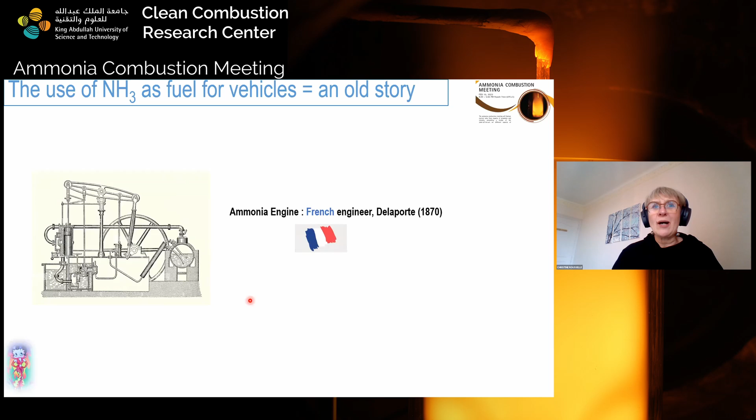So first, I want to start with a small joke. The first people who considered an ammonia engine was a French engineer in the 19th century. But as you can see, it was not really ammonia as fuel, but it was a steam engine. Anyway,

Dr. Room already showed this morning that from the past, there are different examples of the use of ammonia as fuel for vehicles, but we can see that recently there are new projects like the hydrofuel project in Ontario University. The objective is to develop trucks fueled with ammonia with hydrogen.

Also, there is the C-Free Run project in Iowa University. And what is interesting is that start and stop of the engine is done by using hydrogen. And when the engine is sufficiently warmed up, they can run with 90% of ammonia and about 10% of hydrogen. And more recently, there is a new project, Activate, from the Norwegian government. The objective is to develop a small tractor for agriculture vehicles.

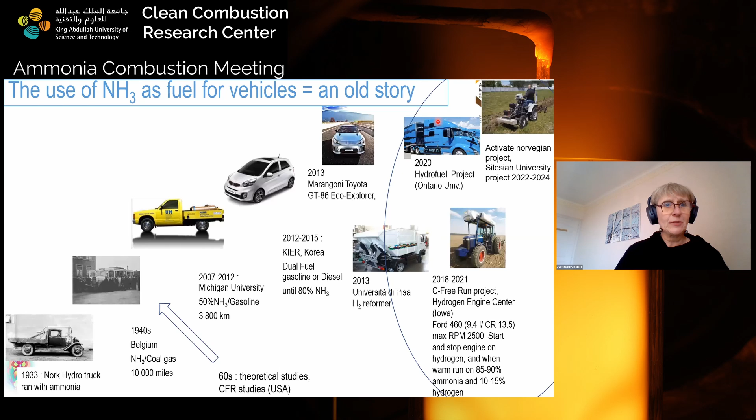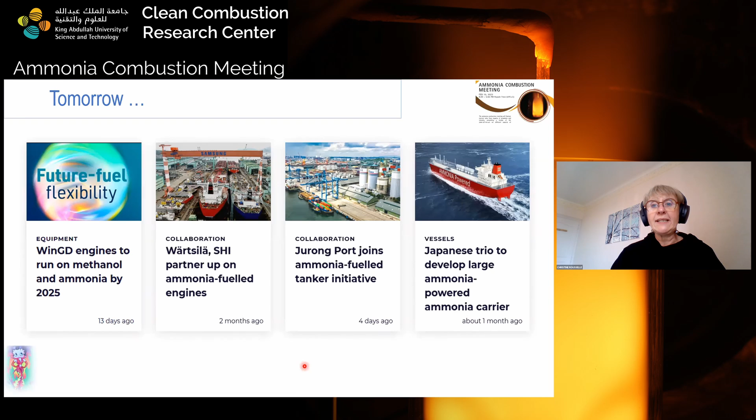Sorry. Okay, but as most of you know, if we go to the website, we have a lot of advertisement about what could be some kind of mobility with ammonia, especially for marine application. Even if they have this kind of advertisement, I'm not sure that until now there is any ship that can run easily with ammonia.

Okay, why is ammonia so relevant to use as fuel for internal combustion engines? Sure, it's great because there is no carbon content, so there is a zero carbon footprint that we can achieve, but also no CO or particulate matter emissions. We don't exactly know because we can have some issue about lubricants. There is a good energy density in comparison to hydrogen itself, and it is more similar to gasoline or diesel fuel. But what about ammonia combustion characteristics?

I don't want to take so much time to explain again, as we already saw a lot of presentations on this purpose during this day. But if we compare only auto-ignition delay with hydrogen, methane, isooctane or even methanol, we can see that the auto-ignition delay is very important in comparison to these fuels. Also, the adiabatic flame temperature will be strongly lower, less than 200 Kelvin lower, and the laminar flame speed is so small that we can have some questions about the good way to use ammonia in engines.

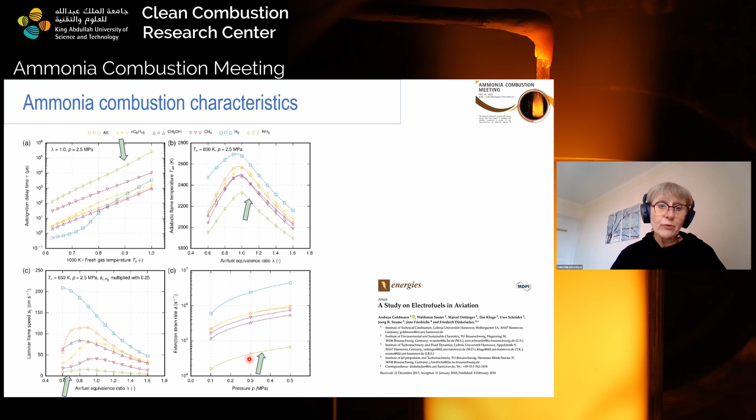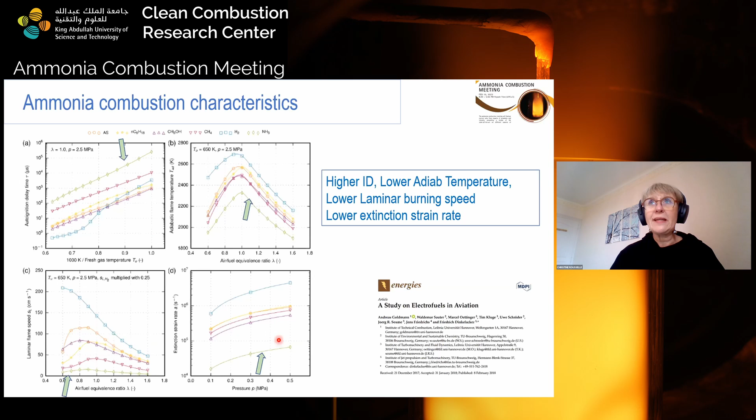And what is also interesting is that the extinction strain rate is very small. So higher ignition delay, lower adiabatic temperature, lower laminar burning speed, lower extinction strain rate. Can we think that it is possible to run in an engine? Certainly, it could be possible if we use higher compression ratios than we can use currently. Do we need a combustion promoter to boost performance and ensure stability?

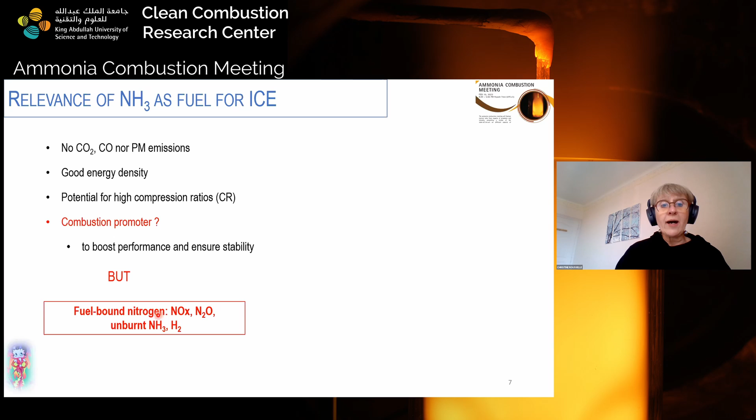But what we know is that, as ammonia is a fuel-bound nitrogen, we will have NOx emission and also N2O. And most of the time, we forget that we can have unburnt ammonia and hydrogen. Even if we use only ammonia as fuel, at the exhaust we can have some hydrogen, due to the decomposition of ammonia in situ in the combustion chamber itself. So it's clear that we need some mitigation strategy to limit pollutants and also to develop accurate post-treatment, as we will see after my talk.

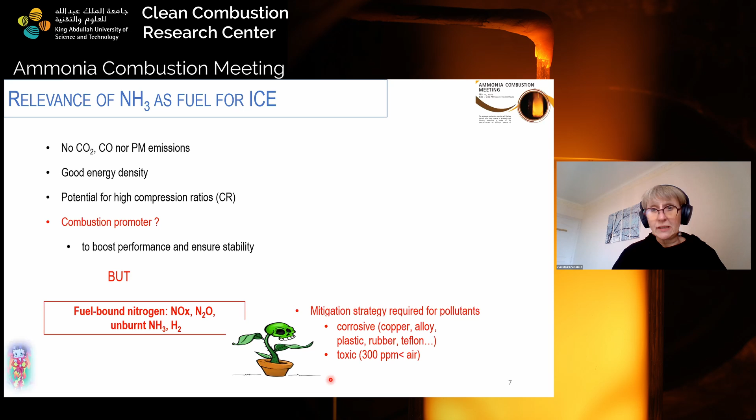And as you know, unfortunately, ammonia is corrosive and toxic. So internal combustion engines fueled with ammonia remain very challenging. What do we know exactly? From the past, from the different studies that we have, as with any fuel, we can consider spark ignition engines or compression ignition engines. To boost the combustion, we need an ignition or combustion promoter.

Also, in a compression ignition engine, we need at least a compression ratio of 35 in order to auto-ignite ammonia. So we need the help of a reactive fuel to promote the ignition. From the past, there are different bi-fuel experiments, blends with gasoline, natural gas, methane, alcohol, hydrogen, or for compression ignition engines with diesel, biodiesel, DME, and hydrogen. When we decrease the content and go until hydrogen and pure ammonia, it's sure that we will also decrease the carbon footprint.

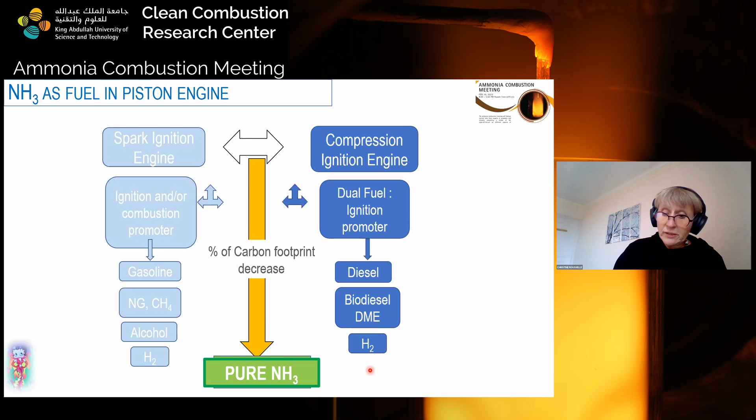Therefore, trying to use ammonia alone in an internal combustion engine would be the best choice to reach the zero carbon footprint objective. Some recent examples from the literature about spark ignition engines, from the last 10 years. First, from Pisa University, they used a very small engine with a port fuel injector, with ammonia plus hydrogen. They also studied the opportunity to use this kind of engine as a range extender.

More recently, we have another interesting study about the possibility to mix gasoline and ethanol with ammonia, but we can see that the content of ammonia remains very small. What is interesting is the idea to develop an emulsion between ethanol, gasoline, and ammonia. After, in Orléans, we studied pure ammonia or ammonia with hydrogen. It was in a current single-cylinder engine, fully premixed, with a regular compression ratio for a spark ignition engine.

More recently, we have a new study on natural gas and ammonia blends, the unique study in heavy duty. It was injected premixed by port fuel injection with a relatively low compression ratio engine. And recently, there is a new result from Toyota Group, and they especially focus on the cold start, in order to reform a little bit of ammonia and ensure the start of the engine. The compression ratio was relatively low.

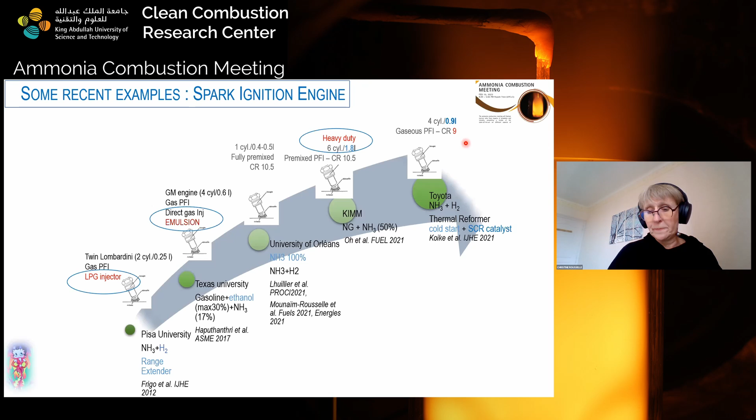About compression ignition engines, the studies showed different applications. Mostly, we can see dual fuel. It could be with DME or with diesel. But it is important to note that there is no more than 40% of ammonia in the fuel. And we have only one study considering HCCI combustion with ammonia. Also interesting to note is this last study with a bigger engine with a high compression ratio.

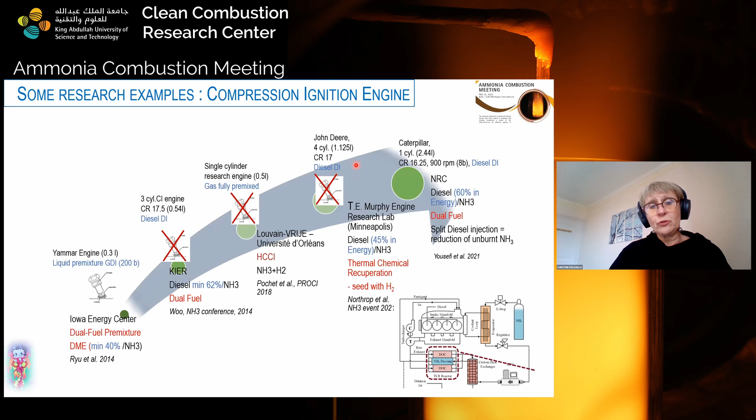If we summarize what we know from these previous studies, in the case of compression ignition engines, in comparison to a full diesel engine, the addition of ammonia increases the torque significantly, decreases hydrocarbons and CO2 emissions, but can also decrease NOx when the ammonia content is lower than 70%. When blended with DME, the maximum engine load is relatively limited. We cannot reach values similar to pure DME. And hydrocarbons, CO and NOx increase, but there is a strong decrease of soot.

If we look at the spark ignition engine, we can compare with a full hydrogen engine, natural gas, or gasoline. What is interesting is that with hydrogen, we increase the cycle thermal efficiency and the engine power, ensure no carbon emissions, and the same NOx emissions as a gasoline engine. With natural gas, you have a peak pressure decrease, but unfortunately, NOx and NH3 increase.

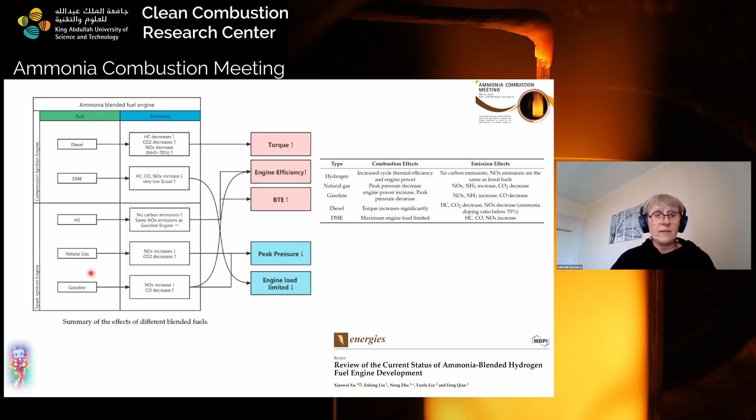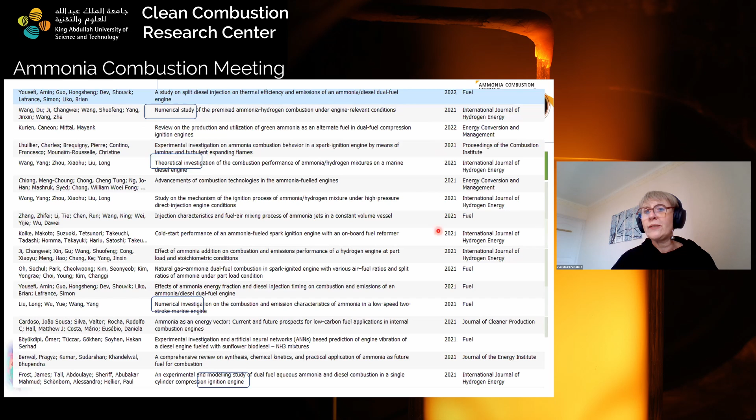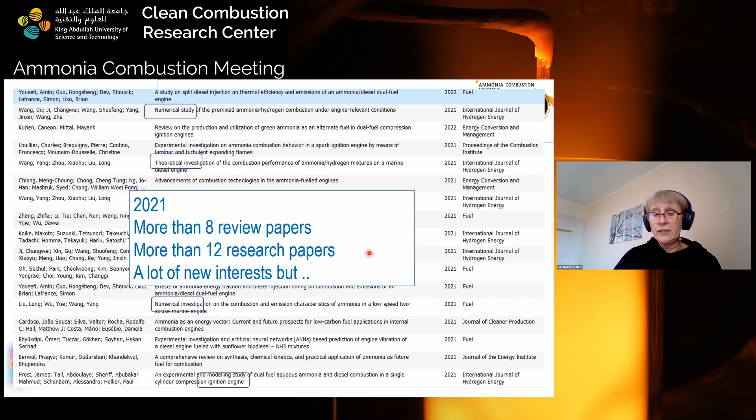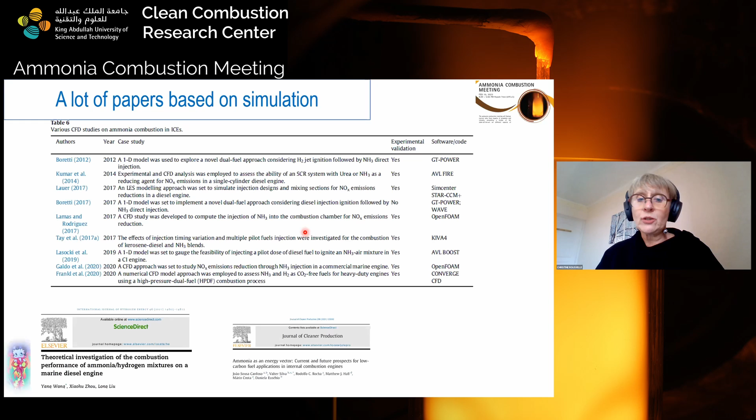Last week I researched the more recent studies from 2021 and 2022. There are more than 8 review papers and more than 12 research papers considering ammonia as fuel in engines. It's clear there is a lot of new interest, but there are also a lot of papers based on simulation to get an idea of the advantages of using ammonia as a fuel in engines. Can we simulate an ammonia engine with high accuracy and predict ammonia combustion in the engine?

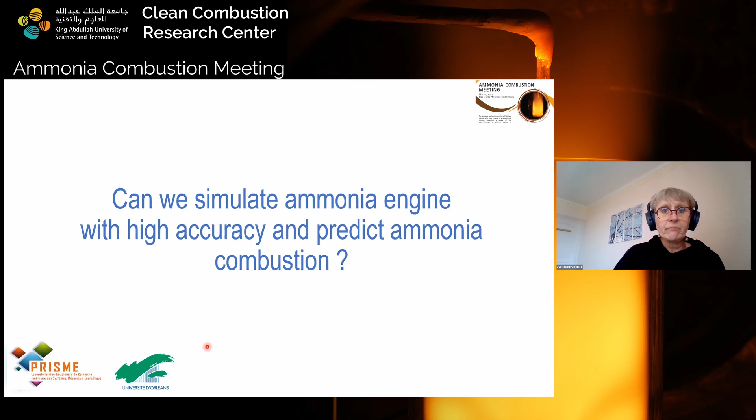We have different possibilities to use ammonia only in an internal combustion engine. As I already told you, it's difficult to auto-ignite ammonia, so we need an igniter, a spark, or ignition by pilot fuels. Ammonia can be provided to the engine in gaseous or liquid phase, by port fuel injection, direct injection, or perhaps both. If we want to add hydrogen as an ignition promoter, we can consider another tank with hydrogen or an onboard reformer.

This would be a spark ignition engine. What we have to deal with is optimizing the load as a function of engine speed, resolving the cold start problem, and reaching an ammonia-NOx emission trade-off. If we use a pilot injection of a reactive fuel, we can also use a diesel-design engine and optimize the different injection systems.

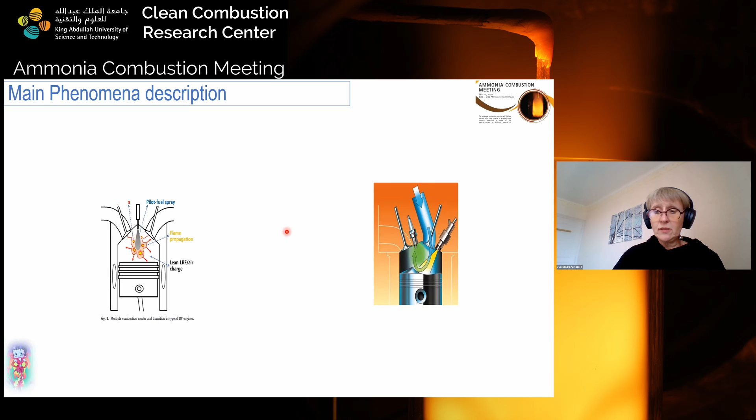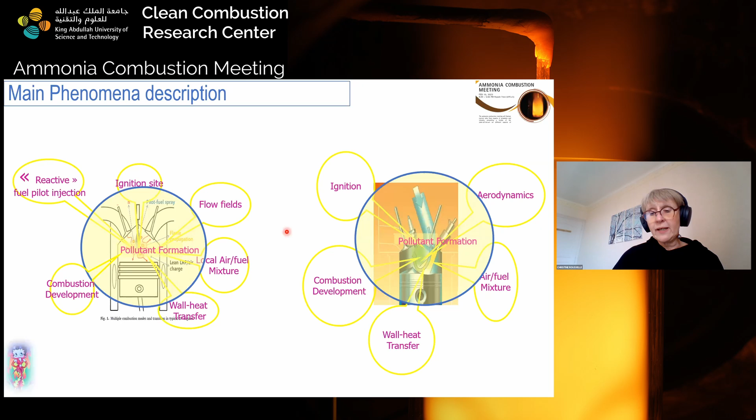As everybody knows here, if we consider what I can say a dual fuel engine, but it is not really a dual fuel engine, it's kind of RCCI engine, because the idea is really to add a small quantity of reactive pilot fuel spray, or a classical spark ignition engine. For both, we have a lot of fundamental characteristics that we have to better understand before being sure that we can predict the combustion development in this engine.

For the first time, we performed some visualization of ammonia flame propagation in an internal combustion engine. It was with NH3 ignited by decane pilot injection, less than 11% in energy input, and in comparison with spark ignition in the same engine but without decane, where we have a spark plug.

Yes, so this is a classical premix flame. Even if it is a diesel architecture engine, we can see that the flame is really premix flame propagation. And here we have first the ignition of the decane pilot quantity, and straight away we have the development of the premix flame.

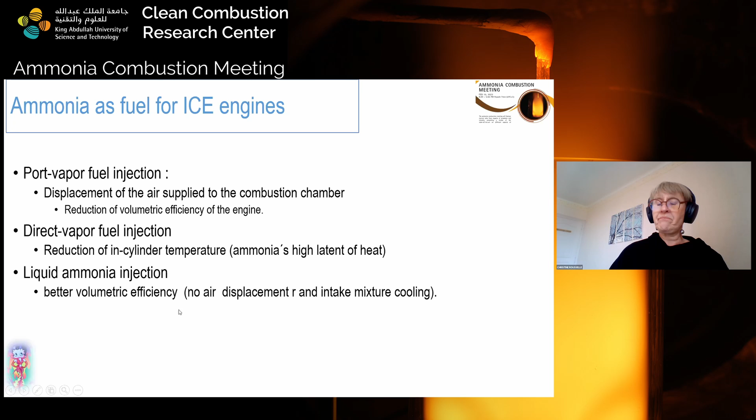Okay, so as I already told you, we have different ways to consider the injection of ammonia. For port vapor fuel, we have a problem of displacement of the air supply to the combustion chamber, the reduction of the volumetric efficiency of the engine. If we consider direct vapor fuel injection, we will have a reduction of in-cylinder temperature due to ammonia. And if we consider liquid ammonia injection, we will have better volumetric efficiency, but it's clear that we have a strong decrease of temperature in the combustion chamber.

The problem is, about ammonia injection, we know nothing. There are only 2 studies focused on liquid injection. And if we look at the vapor pressure trace, it's very different than what we can have with classical fuel like gasoline or ethanol. And if we look at the spray development, it's clear that due to the specificity, we have a narrow spray, certainly with plenty of vapor content inside. So what's the consequence of the flash boiling specificity? How can we consider that vaporization models are accurate?

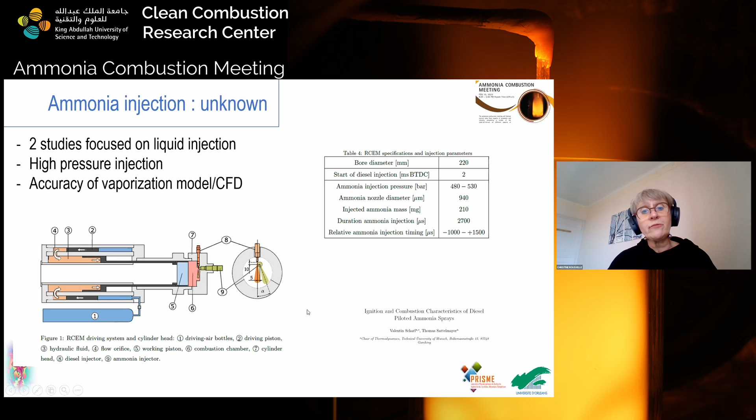There is another study more recently. It's a very interesting study because they study injection of ammonia with also injection of diesel pilot fuel in a rapid compression machine. The injection pressure was relatively high, around 500 bar, but this work is in process. So for the moment, there is no image on the ammonia spray characteristics.

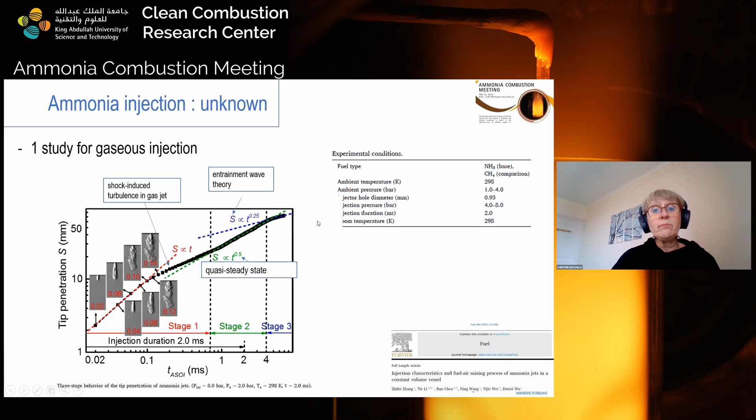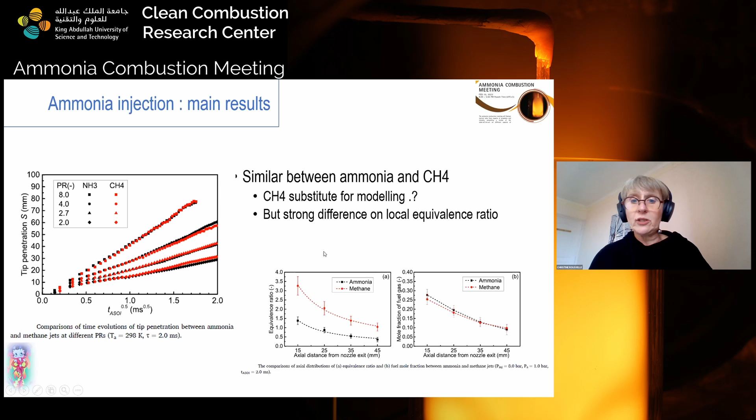About gaseous injection, there is a recent study where we can observe, as a function of time, the penetration of the gaseous jet. And we can see that we have different phases of the development, but it is not really well known because it's more like a diesel spray. But what is interesting is when they compare with methane, it's quite similar. So perhaps it could be possible to substitute ammonia with methane for modeling purposes. But we have to consider that there is a big difference in local equivalence ratio due to the air-fuel ratio for ammonia.

Okay, how can ammonia be suitable for higher engine speed due to its low flame speed? It will be really limited by the narrow flammability limit and also the low flame speed itself. Do we reach incomplete combustion? Do we reach misfire? What about the ignition process due to intrinsic flame instability? And as one possible way to enhance mixing and thereby facilitate combustion of ammonia, do we need to increase the turbulence in the combustion chamber or not?

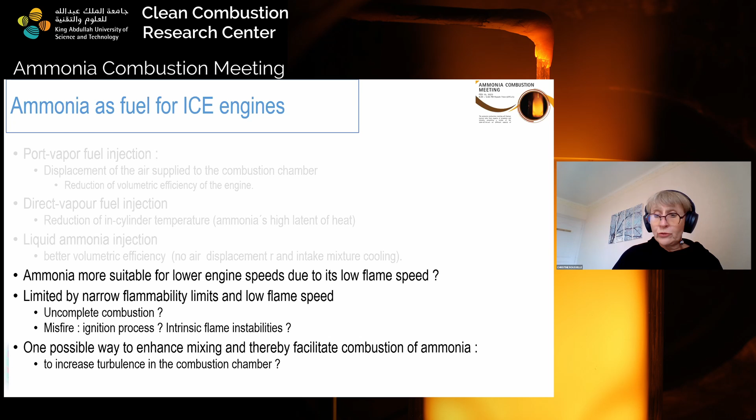As we already saw today, there is not so much data about ignition delay, especially when we want to consider ammonia ignited by a diesel type pilot injection. We have recently some data about NH3 with n-heptane or NH3 with DME with a small quantity. But this is relatively new, and we have no data for many temperature values.

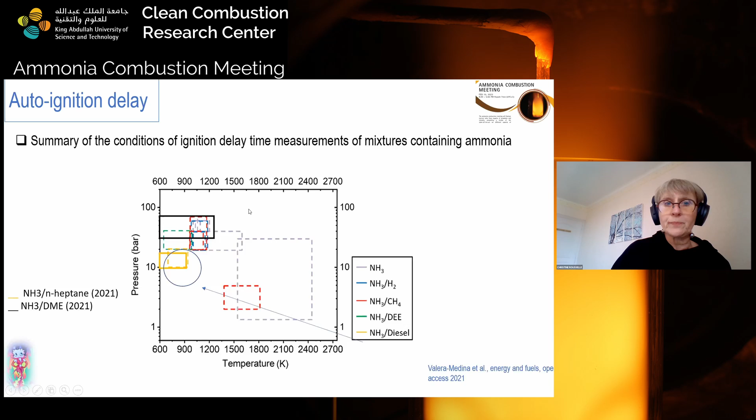For example, if we consider again the problem of ignition by another fuel, there is only one study about the impact of ammonia on n-heptane ignition delay. And what is really interesting is that the addition of ammonia in n-heptane changes the ignition processes and greatly delays the first stage ignition.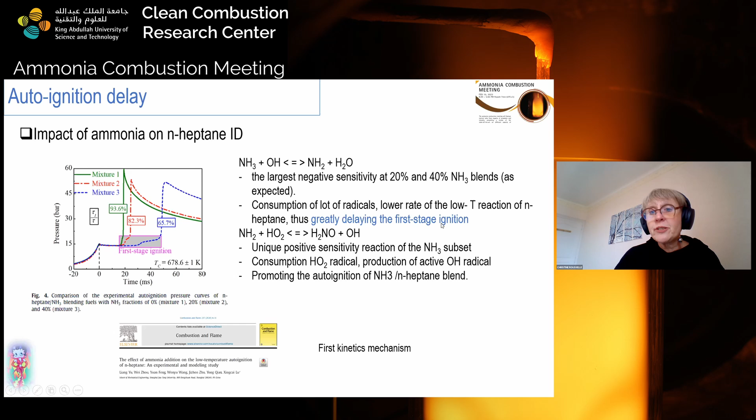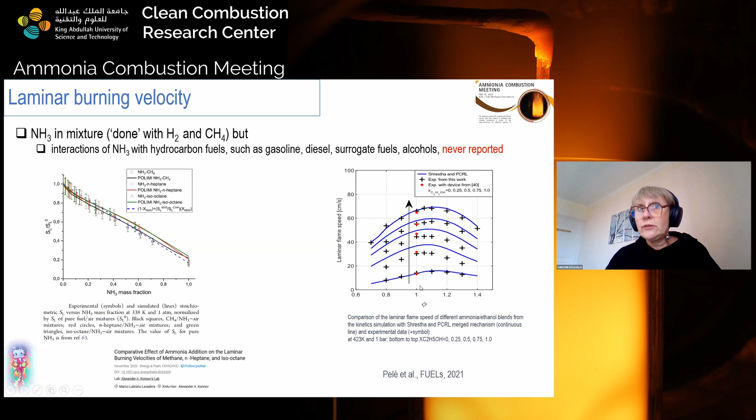Also, about the laminar flame speed, there is not so much data about laminar flame speed evolution with regular fuels like here n-heptane or isooctane. And here it's also for ethanol. It's a recent study where we try also to see what will be the effect of the content of ethanol in ammonia flame.

Okay, about premixed turbulent flame interaction. There are some studies about premixed turbulent flame interaction. Most of them are focused on gas turbine applications. And there is only one about what kind of turbulent combustion regime we can have in engines. And what we can conclude is that it is not really easy to correlate with the Lewis number, especially when we have some ammonia hydrogen blend.

Karlovitz is not sufficient to predict turbulent flame speed for high ammonia content. The mix between Damköhler and Karlovitz is better, but it's clear that it's a complex interaction of diffusional-thermal instabilities and turbulence.

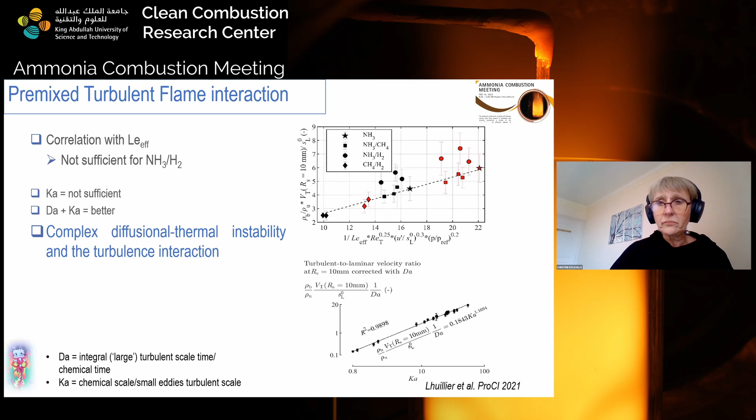Before finishing, I want to focus a little bit on the cold start problem that we have to deal with before considering ammonia seriously in engines. In fact, we know there is a low flame speed and narrow flammability limits of ammonia. This will lead to combustion instabilities. Moreover, low combustion efficiency, especially at low load, so we will have more unburned NH3.

Recently, in a Toyota paper, they highlight that only Frigo et al., in 2013, investigated the cold start of a two-cylinder engine burning ammonia with an external hydrogen supply, and their conclusion is that it needs a lot of hydrogen, about 5 times larger than that of NH3, to start the engine. The consequence will be that we need another hydrogen tank to start the engine.

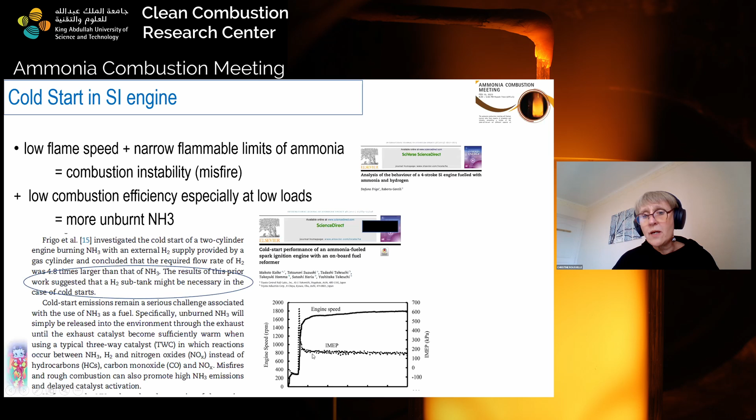But in this study, they try to start the engine by considering a thermal reformer, so an onboard fuel reformer. And what we can see is that after 30 seconds they can reach sufficient stable IMEP and run only with ammonia fuel. Perhaps we can also increase the compression ratio in order to avoid adding 300% of hydrogen at the start.

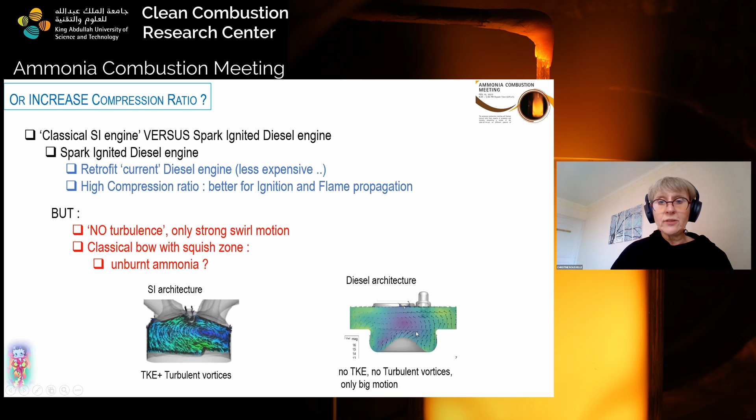For that, we try to see what happens in a classical spark ignition engine versus a spark-ignited diesel type engine. Why? Because a diesel type engine is designed to run at high compression ratio. Moreover, we can retrofit current diesel engines, so it will be less expensive. But the main problem with this type of engine is there is no turbulence, only strong swirl motion. And also, due to the classic bowl shape, we can have a big squish zone. It means that we can certainly have more unburned ammonia. So these are two views to explain the difference between the two kinds of engine architecture.

So here we plot what we get in a spark ignition engine with a compression ratio of 10.5, as a function of the equivalence ratio, not so far from the stoichiometric one. So lean case, rich one, stoichiometric. And here it's with 0% of hydrogen. We try to see what will be the minimum IMEP that we can reach with this kind of engine fueled with ammonia, and we can see that we can reach only 5 bar of IMEP. So it's very high; it's not start conditions of the engine. And when we add 5% or 10% of hydrogen, we can reach lower than 3 bar.

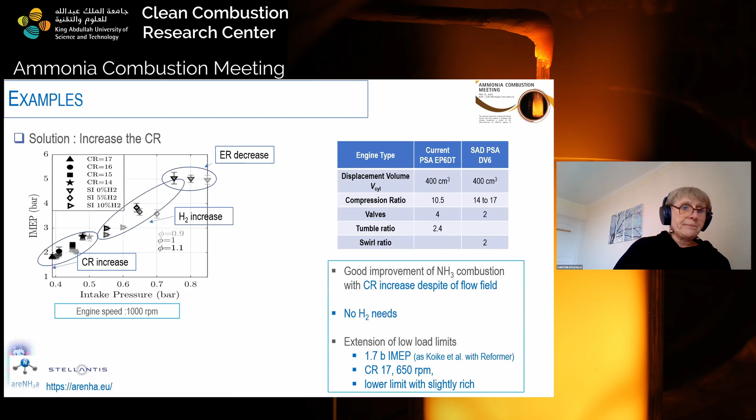If we compare with the diesel architecture, we can see that, as expected, when we increase the compression ratio, we can decrease the IMEP limit. And what is interesting, we don't need hydrogen. We also did the same at lower engine speed, and it's clear that we can reach the same minimum IMEP that the Toyota group obtained with a reformer. Oh, sorry.

Okay, we continue this study by testing different types of engine architecture and different types of piston bowl. So here it was our current spark ignition engine, and we use another spark ignition engine where we can change the compression ratio, but when we change the compression ratio, we also change the piston shape. So it means that we change the turbulent flow field. With this we will increase the turbulence near top dead center. This is what I presented before, our diesel engine type architecture. The spark plug was not centered, but a little bit on one side.

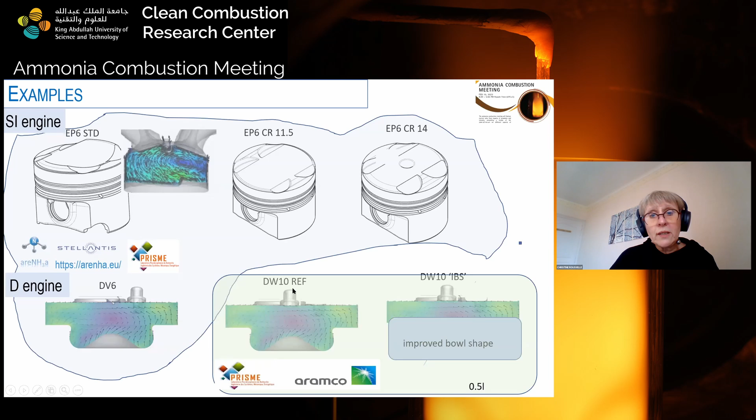This work is done in the ARENHA project. It's a European project where we try to see what we can do with ammonia as fuel. This is done with Stellantis, so the Peugeot group for us. And we also do some other tests with Aramco and Stellantis in order to try to optimize the bowl shape in a diesel type architecture. And what we can see first, we use a centered spark plug, and here we improve the bowl shape.

Here we plot the minimum IMEP that we can reach while ensuring sufficient stability. And this is the first result that we can have. So first, when we have a spark ignition engine without hydrogen, we can improve this limitation by increasing the compression ratio. But it's not so easy to say that we obtain straight away a better limit, because you can see, for example, here, even if I increase the compression ratio from 10.5 to 11.5, so this point to this point, what happened? The IMEP limit increased. This is because the turbulent flow field was different.

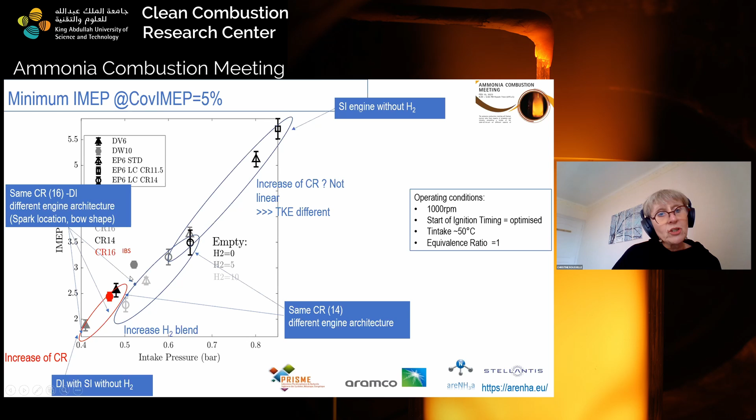Here, when we increase the quantity of hydrogen, we can surely reach a very low limit. Here it's the same compression ratio in a spark ignition engine, and here in a diesel type engine, we can see that we can reach really different limits, even if the compression ratio is the same. Here we have high turbulent kinetic energy. Here we have no turbulent kinetic energy. And we increase the compression ratio from 14 to 16. So we continue to decrease the IMEP limit. But when we try different engine architectures, here the spark plug is centered, and here we try another bowl shape, we can see that it is not so easy to provide some conclusion.

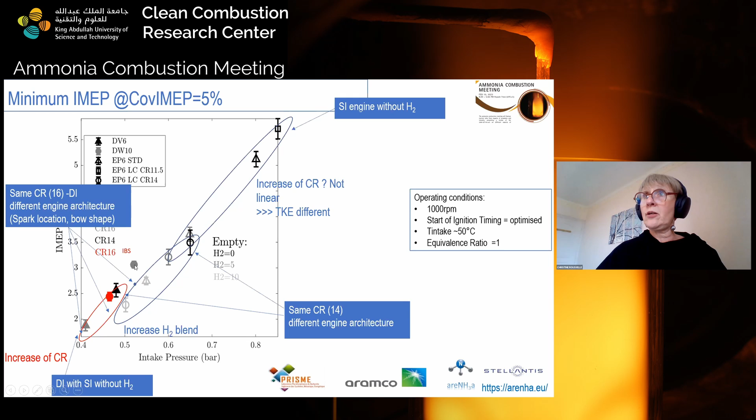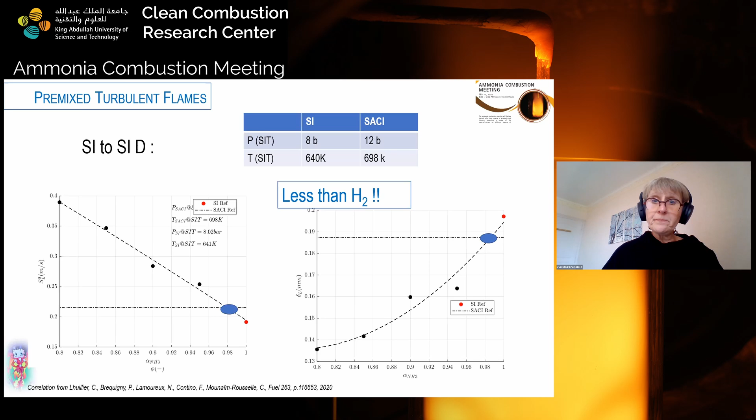In fact, if we compare spark ignition with the spark ignition diesel engine, here is what we have as laminar flame speed at the spark ignition timing. Here with ammonia only. And as a consequence of the laminar flame speed, it's clear that we cannot reach the same value that we can have by adding some hydrogen content. So it's not really due to the increase of the compression ratio that will enhance the laminar flame speed value. It's more complex than that.

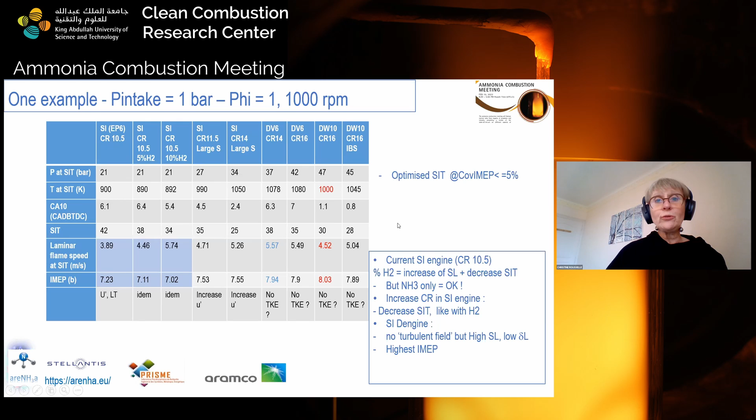Last, if we compare all these engines and at the spark ignition timing I compare the laminar flame speed, we can see that the value could be so different, but at the end, this is at an intake pressure of 1 bar. It's not a limit IMEP. We can have similar IMEP, but we can see that without hydrogen at the compression ratio of 10, the laminar flame speed is not high, but we can have similar IMEP to what we can have with 10% of hydrogen. So really, it's very difficult to conclude what will be the best engine for tomorrow.

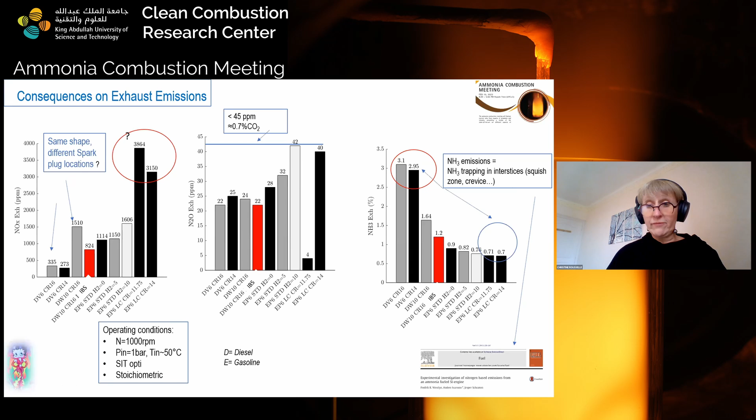Okay, so what are the challenges still now for ammonia fuel in internal combustion engines? We saw that there is a technical impact of the injection system, ignition range, cold start, compression ratio, boosted conditions, combustion stability, operating conditions range, efficiency, thermodynamic conditions, and also exhaust pollutant emissions. And we still need a lot of fundamental study in order to provide accurate, predictive CFD modeling. Thank you.